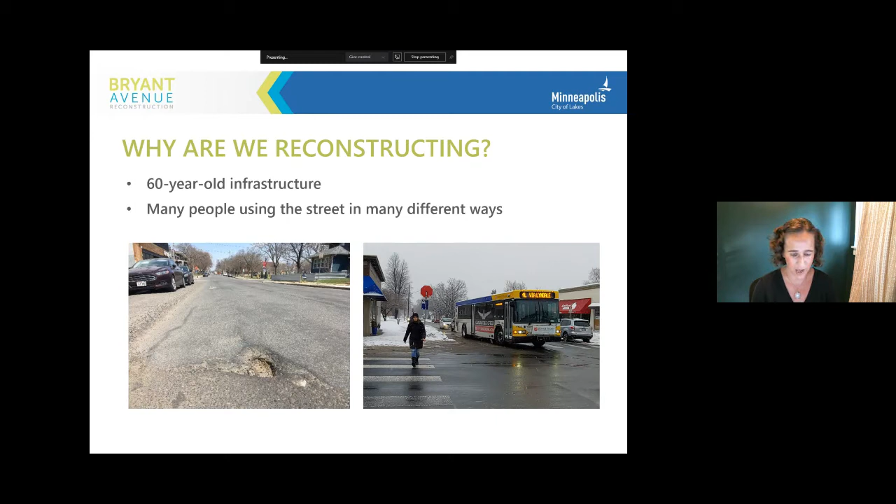The other reason we're prioritizing Bryant Avenue South is because there's many different people using the street in many different ways. This is a highly multimodal corridor. We have high counts for bicycles and pedestrians, as well as transit users. So we at the city are prioritizing those types of streets when we're looking at asset condition on top of that to make new investments.

A note about funding for this project: there are assessments that come along with this reconstruction project that will be charged to property owners adjacent to Bryant Avenue South. The assessment amounts do not vary based on the project design—we could pave this street with gold and the amount we charge property owners would not change. There's a difference in rates charged between residential and non-residential properties, like commercial property. But for the large majority of this corridor, it's a typical single-family residential lot. For that type of lot, you'd expect to pay approximately $4,500 to $5,500 plus interest for this project.

These payments can be made over 20 years, but there are different payment terms available. If you have more questions, you can talk to our special assessments office, or if you don't have a typical residential family lot and want a better range for you, their contact information is below.

The other thing to note is for the Bryant Avenue part of this project, our latest rough estimate is approximately $19 million for this 2.5-mile reconstruction project. Of that $19.4 million, we expect $2.1 million to be paid from assessments, and the other amount would come from different city sources.

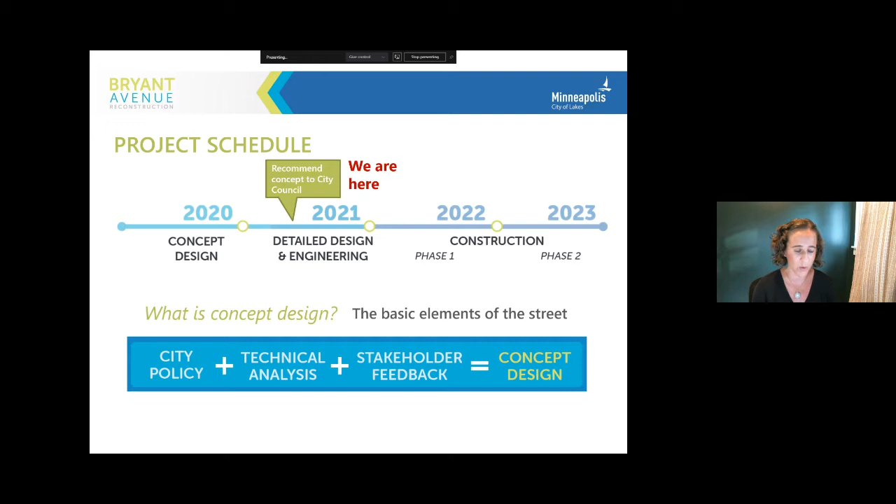For the project schedule, we are wrapping up this phase of engagement, our concept design part of the project. We're at the end of that, and we make a recommendation to the Transportation and Public Works Committee of the City Council. After that recommendation is passed by council, we move into our detailed design and engineering phase. During that phase, the basic elements of the street don't change, so we're here tonight sharing our recommended concept for what the street will look like going into detailed design. We then expect to begin construction in 2022, with a phase 2 of construction in 2023, given the length of the project. We don't know yet which side of the project, north or south, would go first—we're still working on that construction phasing, which would be worked out during detailed design and engineering.

So I wanted to give an overview of what our concept design is, the types of things that go into this process, what we've heard so far, and how we've incorporated that into our recommended design that we're sharing with you tonight. There are 3 big pieces that go into concept design: our city policy, our technical analysis of the corridor, and our stakeholder feedback from conversations like this. It's important to understand that when Public Works comes to a reconstruction project like this, there's a whole suite of policies that guide and direct us for what is possible and what we can bring out as potential options for a street design.

The overarching thrust of these policies is that we are to prioritize our most vulnerable street users first. That means we're looking to make safe, comfortable, and connected routes for pedestrians, people who bike, and people taking transit. That's really our guiding policy for how we design these streets. Obviously there's a lot of balancing act that comes into this, but that's the thing we keep in the forefront of our minds.

The next piece is, from those city policies, at the outset of this project Public Works derived a set of project goals. Those should probably be pretty familiar to some of you, but I'll read them out: improve pedestrian safety, access, and comfort; create an all ages, all abilities bicycle connection in the area, so something an 8-year-old would feel safe riding, with comfortable and safe crossings at busy intersections; support existing and future transit service; use green infrastructure to collect and treat stormwater runoff; and finally, accommodate business deliveries and customer access.

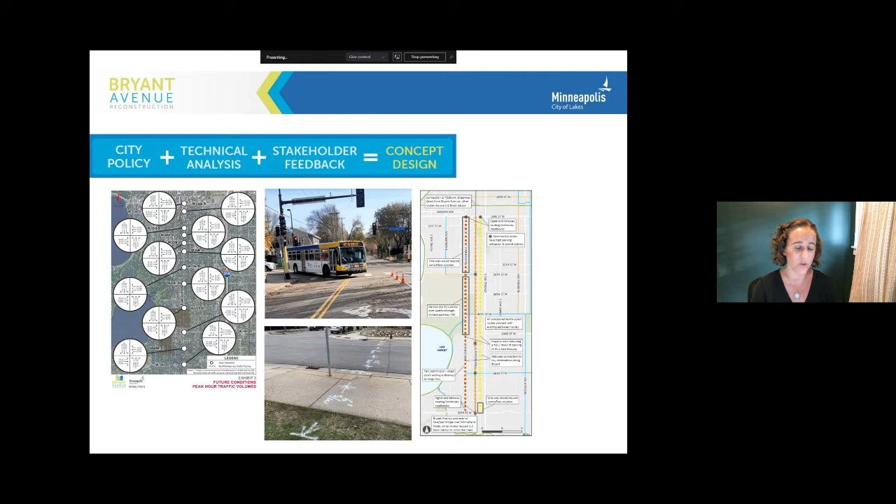The last piece that goes into our concept design recommendation is stakeholder feedback. For this project, we've had four rounds of stakeholder feedback, this being our last one. I'm going to share a bit about the high-level themes we've heard through those, and how we've incorporated them into our recommended design tonight.

Throughout this process, as I mentioned at the outset, it's been a pretty challenging time to stay connected with people, so again I want to thank everyone who's had conversations with us. When I look back, we really managed to reach a lot of folks through some of these online opportunities, which are probably going to stay with Public Works going forward, given that they often offer different flexibilities for different types of people to attend.

Overall, for this project, we've talked to over 40 businesses via phone conversations and small group virtual discussions. We've attended neighborhood group meetings, talked to corridor and resident stakeholders via our virtual open houses and small group live discussions. We've put up feedback maps and online surveys so people could send us comments directly in an easy-to-use format. We've hosted discussion hours, and between Trey and I, we've had a whole host of conversations via phone and email with all kinds of stakeholders in the corridor.

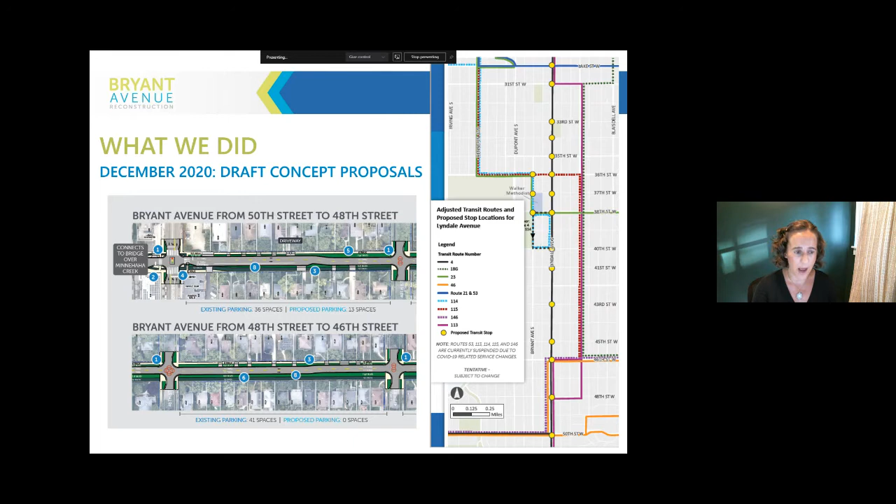We came out with an overview and introduced the idea of what it would look like to move transit to Lyndale. What we heard back from that, after we hosted a virtual open house, as I said — we had feedback maps, we put out a survey — these were the most common themes that we heard.

The first thing we heard was concerns about the idea of a shared use path. South of 40th Street, we had a draft proposal for a shared space for bicyclists and pedestrians to use, so we could carve out more parking and specifically more green space in that southern corridor. People also had concerns about parking removal, specifically at business nodes with this option.

On the Lyndale side, we heard about the difficulty people had when walking, trying to cross Lyndale, specifically at unsignalized intersections. We had concerns about the lack of detail around the design idea itself, and then concerns about traffic congestion and impacts to Lyndale residents in the area if we were to move transit to Lyndale.

So we thought, all right, we've got to go back and think about this some more and look at different ways we can use the right of way to try and meet those project goals and stakeholder priorities. So we went back to the drawing board a little bit. The first thing we did was review our alternative bike routes.

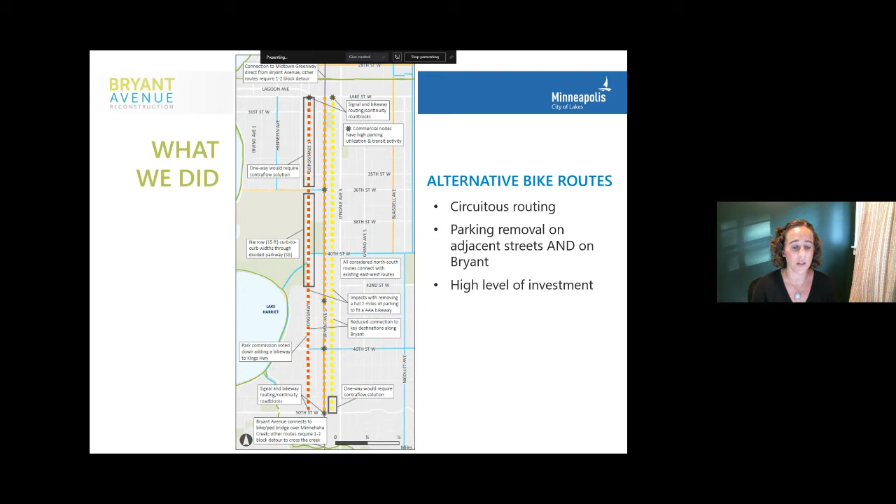So we started to think about the one-way option. We had somewhat considered this idea as a potential option, and asked about it in our earlier survey, but got mixed results because we didn't have a lot of detail around people's interest in it.

Given the original results of people's take on the two-way, we started to detail out what a one-way would mean, what the trade-offs would be, and what traffic challenges we may have. When we looked at it, there were a lot of really good things that came out of this in terms of our project goals and stakeholder priorities.

First, we'd be able to fully separate out a bicycle trail and a sidewalk for the full corridor. Second, we'd be able to put in more green space than even with the two-way. And lastly, we'd be able to maintain more on-street parking, specifically at our business nodes.

Along with that one-way option, we brought out a detailed drawing of what it would look like and what it would mean to move transit to Lyndale. Trey can talk a little bit more about that in the second half of this presentation.

In response to that May draft, the biggest themes we heard were support for the one-way option, a fair amount of support for that. We didn't get full support, but we started to hear a lot of people seem to think this might be a good way to balance everything.

We definitely heard a desire for a wider bike trail. In some sections of the corridor where we have our most constrained areas, we are recommending an 8-foot trail, and people were looking for it to be 10 feet wide through the whole corridor.

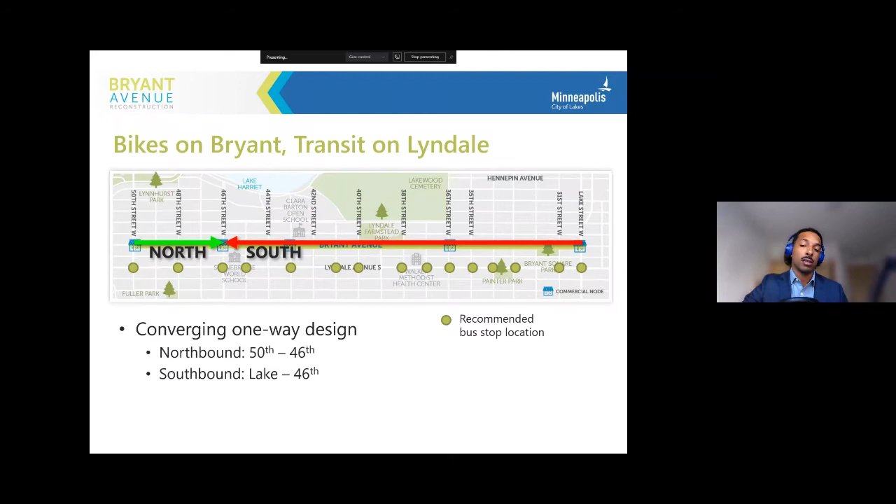Before I talk about that, I want to talk about the recommended transit proposal. We'll be relocating 6 routes — 3 local routes and 3 limited stop routes. There will be 15 consolidated stops, mostly located at signalized intersections, some at unsignalized intersections, with a combination of in-lane and pull-out stops. I'll talk a little bit about what those are in a bit. We'll also be making accommodations for room for transit amenities such as shelters. And for a small portion of the corridor, between 38th Street and 36th Street, we'll be accommodating a contraflow transit lane, which I'll talk about in a bit.

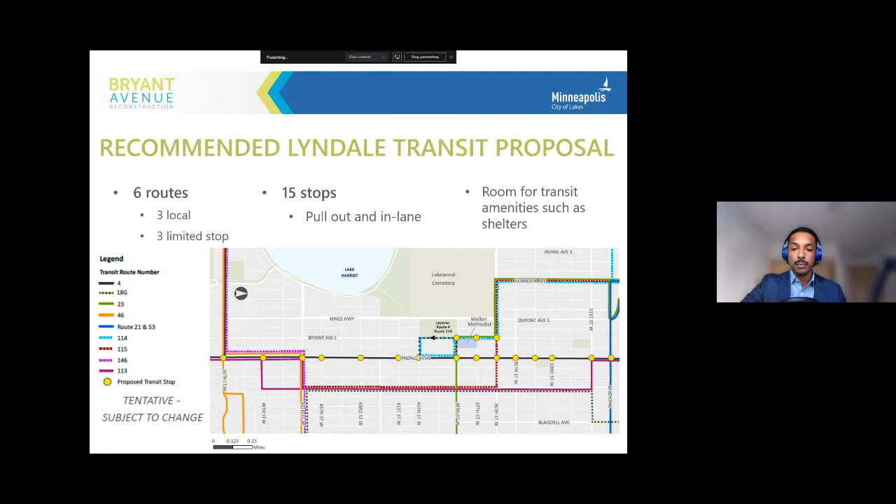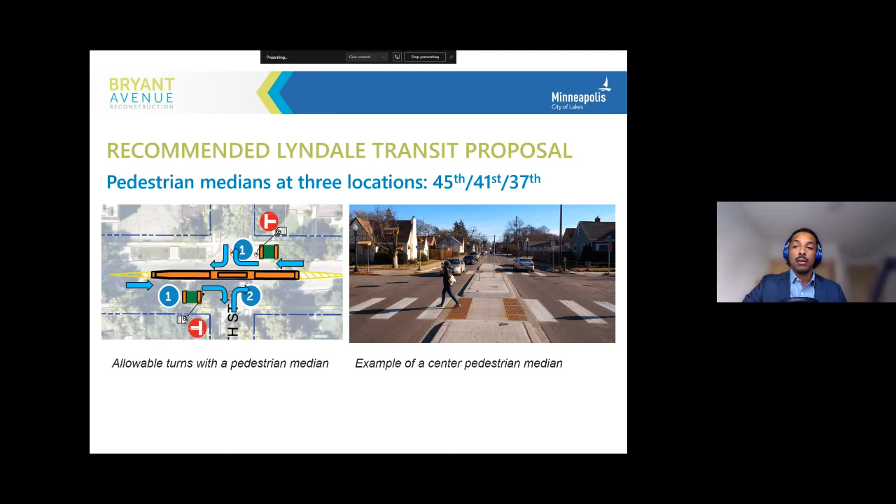Some of the other more substantial changes to Lyndale to accommodate transit are the modifications at 50th to the curb lines, to accommodate a pull-out stop, which I'll show in the next slide, and also to accommodate buses turning from 50th onto Lyndale.

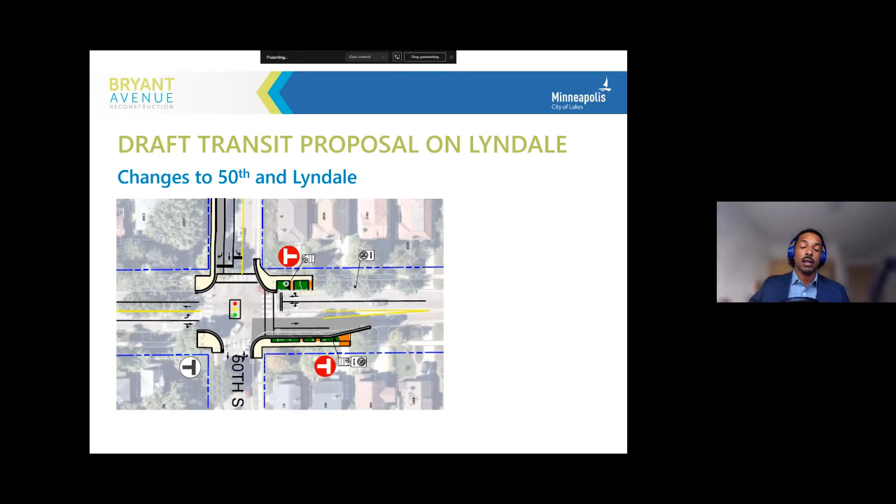In this location, where the arrow is pointing, we'll have to move the curb back a bit to ensure a bus can turn from 50th onto Lyndale and get out of the travelway at a busy intersection, allowing cars to further progress northbound on Lyndale Avenue South.

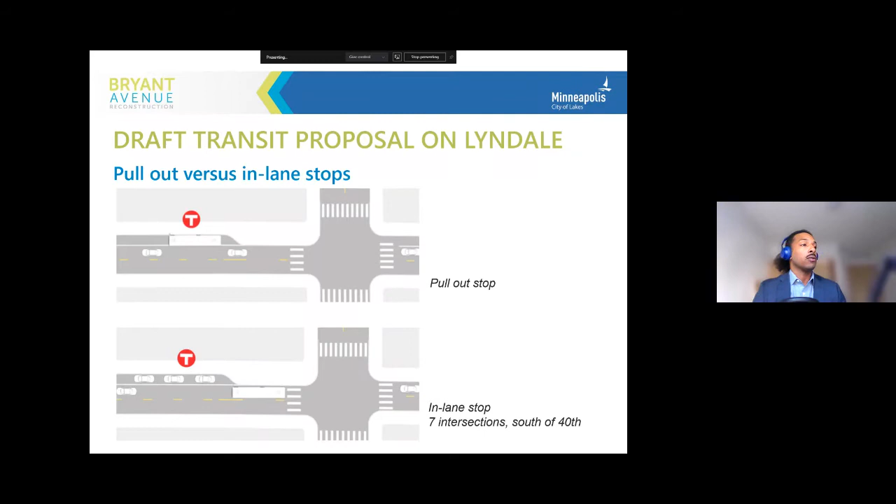Here's a quick graphic showing the difference between a pull-out and in-lane stop. At some locations along Lyndale, we already have a turn lane so we don't have to build a pull-out stop there. In other locations, like 50th, we'll have to build that to accommodate buses stopping on Lyndale. And at other locations, seven intersections south of 40th, buses will stop in-lane, particularly because there are lower transit rider numbers, and that works out when you model the ridership that way.

Some other context around relocating transit to Lyndale: Metro Transit has identified this area, specifically Lyndale, as a candidate for bus rapid transit, aBRT, prior to 2040. ABRT essentially means half-mile stops, so for a 2.5-mile corridor we're talking about a minimal number of spots. But ABRT also comes with the addition of bus shelters, which you can see in the bottom left graphic, requiring a bit of space to accommodate off-street.

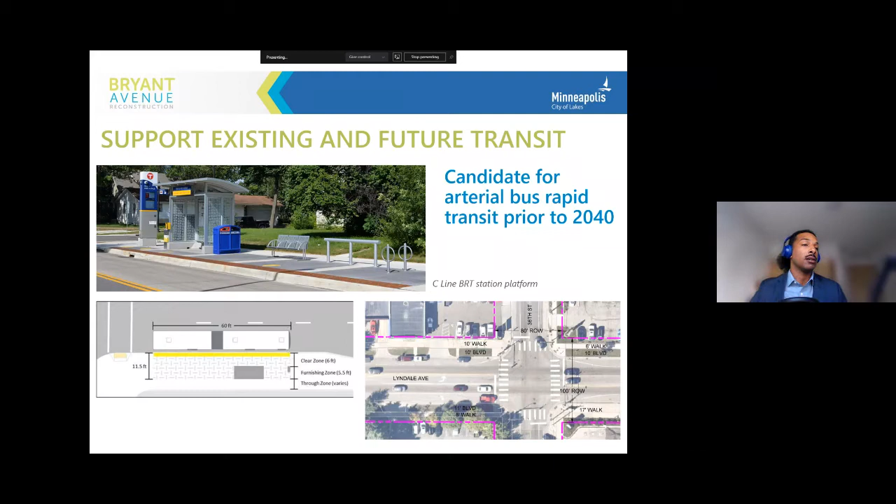So a bit more about the converging one-way concept, and the one-way concept in general, and the opportunities it presents to address some of our city goals and stakeholder feedback: we're able to separate out space for bicyclists.

We heard when we came out with our concept on December 20th that the shared use trail in the southern half of the corridor wasn't really meeting a lot of stakeholder priorities, and in some cases, city goals. So we're thinking that by getting more space through the one-way design, we're able to separate those bicycle facilities out.

We'll separate the bicycle facilities out, providing separate space for pedestrians and separate space for bicyclists for the full length of the corridor. We're also able to get a lot more green infrastructure along the corridor. With larger boulevards, we're able to treat more stormwater, and as Liz mentioned, get more parking at some of our areas where we know we need an acceptable number of parking spaces—our business nodes.

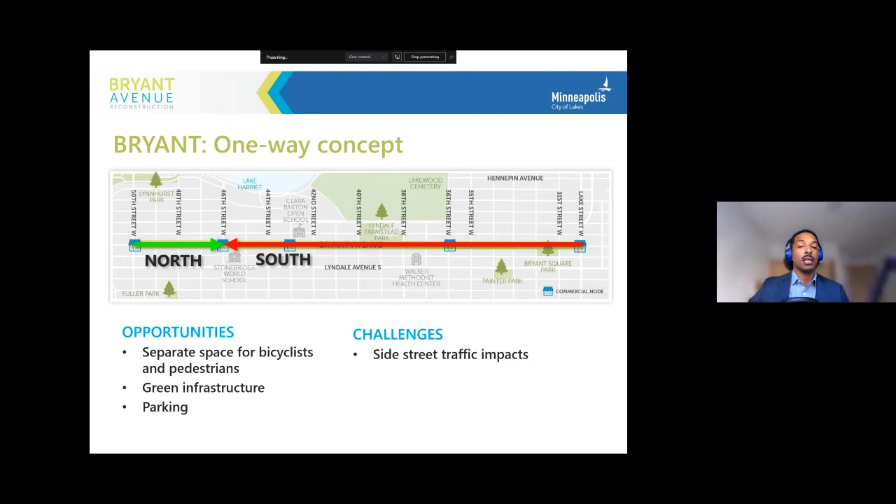So the converging one-way design—some of you may be asking, why is that a thing? It's particularly because, since Bryant is hemmed in by Lake and 50th, two busy roads, we need to be able to get vehicles from those roads down into Bryant.

Also, regarding the southbound direction from Lake to 46th, in this image is Clara Barton Open School, which has bus loading on the west side of the street. Buses don't have doors on the left side, so we have to accommodate how kids will load onto those buses during busy school times. We actually went out to the corridor and observed one of their loading hours, and it's essential that they get the space they need to load the kids onto the bus—it's an interesting thing to watch.

But also, regarding having a northbound one-way from 50th to 46th, it's primarily to serve as a confluence for traffic coming off 50th.

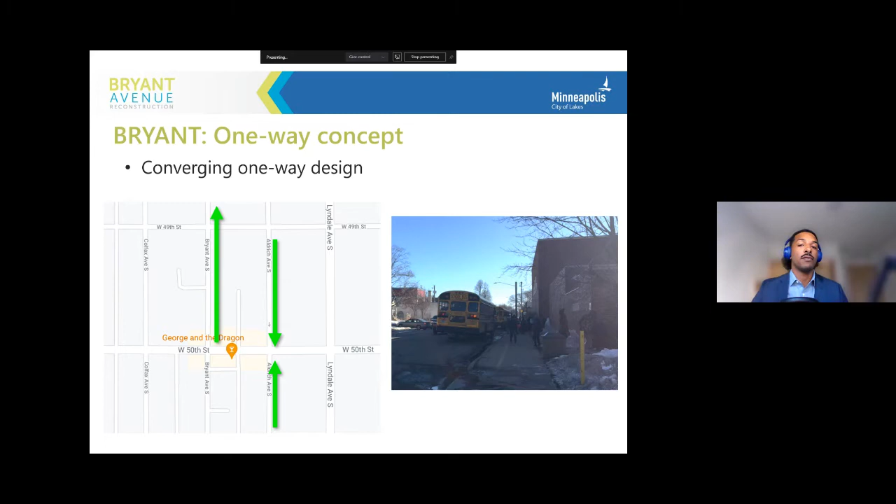So a bit more on the traffic impacts. Here they're showing generally what the impacts on the adjacent streets will be because of the converging one-way design. I'll start with Lyndale. Just to note, Lyndale is a busy road that carries about 10,000 vehicles a day, and during the peak hour we're anticipating about 65 to 100 additional vehicles. Given the scope of Lyndale's 10,000 vehicles a day, that's a pretty unnoticeable amount. For the adjacent side streets, Aldrich, Colfax, and DuPont, we're expecting about 20 to 35 vehicles in the peak hour, which is a modest increase on these residential roads, but nothing too exorbitant to where we wouldn't feel comfortable with our proposal to do the converging one-way design.

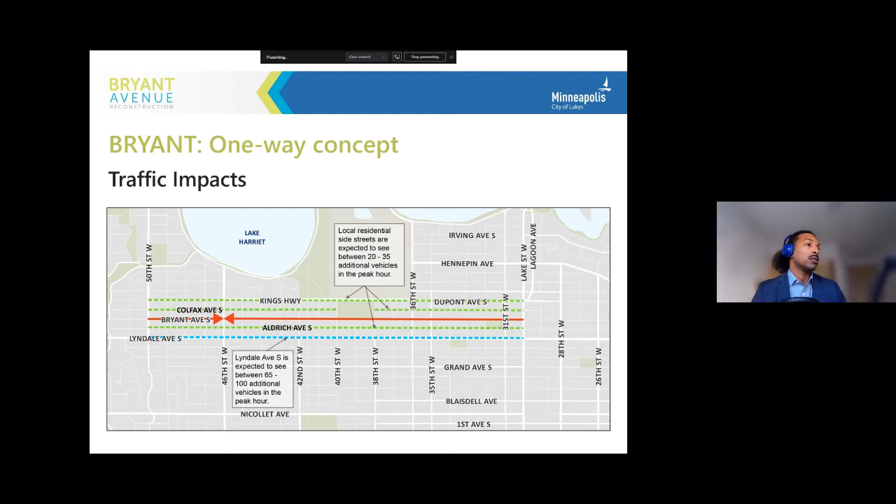To address some of the feedback we received during our last round of engagement, where people felt uncomfortable with a one-way design, we got a lot of comments about the speed at which vehicles would travel along a one-way, more akin to the typical one-ways in the city, like Blaisdell, which have two travel lanes and a wider corridor. This design would be more similar to West Minnehaha Parkway, where we have a narrow road cross section coupled with bump outs and on-street parking right-sized for the expected use. That presents a constrained, circuitous, meandering corridor that slows vehicle speeds and creates a safer, calmer street.

As I mentioned earlier, we'll be including bump outs, as you can see in the bottom right of our cross section posted on our website, and also on West Minnehaha Parkway, where pedestrians are able to cross the street at a shorter distance.

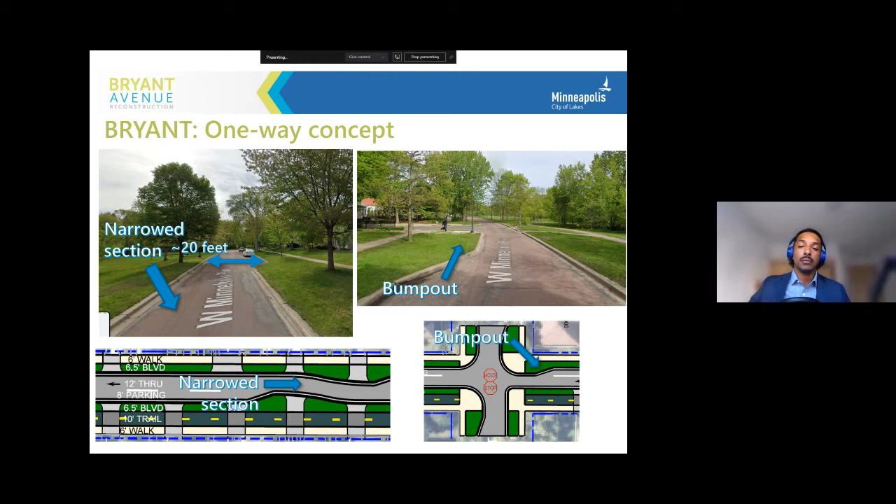Also a bit about the parking spaces on Bryant. While we added in much more parking than what we had in our two-way cross section, we're also right-sizing that parking to address concerns heard during round 1 and round 2 about vehicle speeding toward the southern half of the corridor. When you have overparked parking bays, the corridor appears wider than it actually is, and vehicles feel more comfortable traveling at higher speeds because they don't feel like they're going to hit anything. So we've right-sized that parking and also added treatments like chicanes - that meander in the center of the street - which will help slow vehicles as they travel along it.

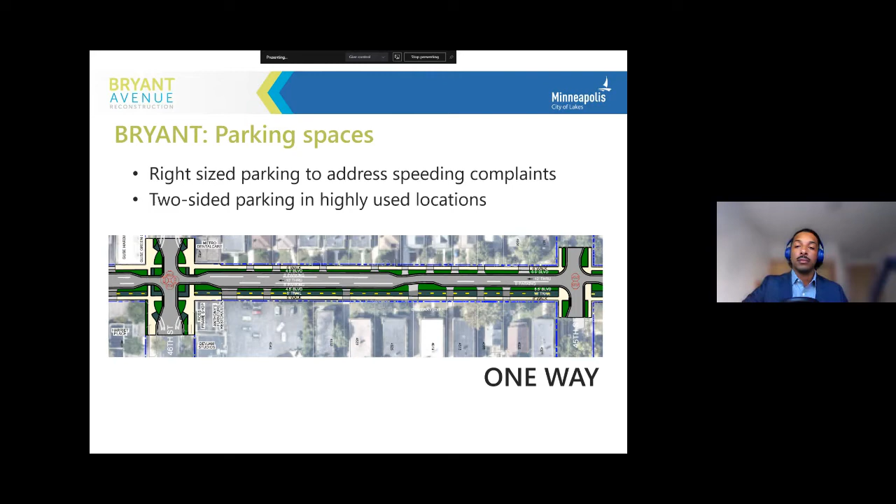I mentioned earlier I'll talk about the contraflow lane we have to accommodate Metro Mobility and transit service. This is particularly because we need to get front-door service to Walker Methodist. Walker Methodist has needs due to the nature of its function for transit at the front door, which we want to accommodate, as well as emergency services that frequently travel to that location.

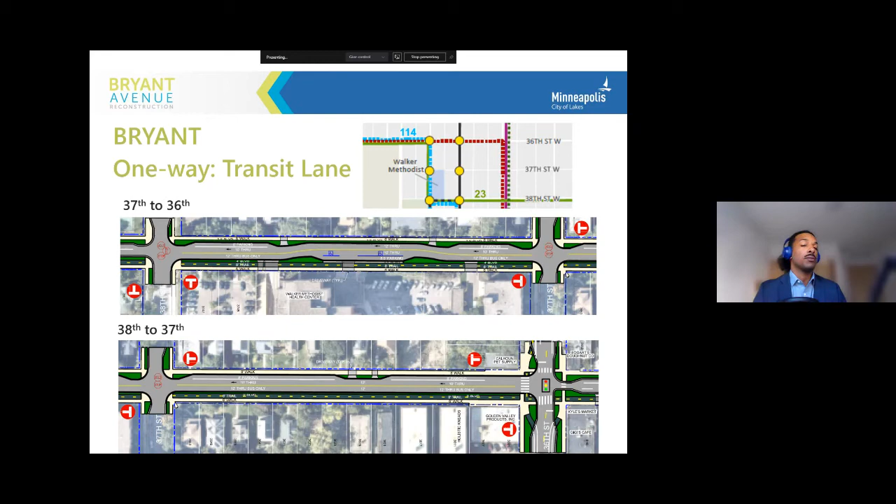Finally, one of the great things about the one-way cross-section proposal is we get to treat more stormwater. Liz may have mentioned this earlier, but adding green infrastructure as a project goal is new for Public Works - not something we've done on projects previously - and we wanted to make it a priority with this project. With the one-way design, we get larger boulevards and can treat more stormwater, with a larger drainage area, as shown in the image here; you can view our stormwater numbers on the website. The larger the drainage area, the more you need to treat it, and in this case much of the drainage area is in the street, so treating it meets some of our project goals.

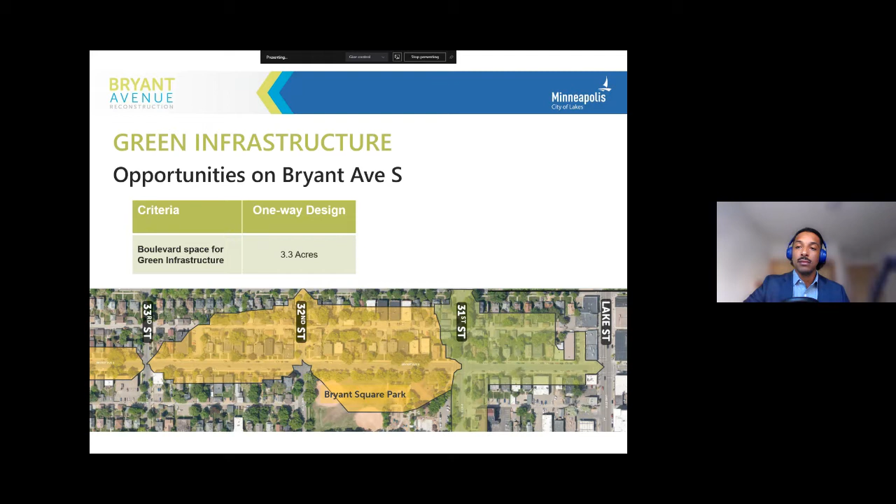I'll briefly talk about next steps. We'll be taking this project to the Transportation and Public Works Committee, a subcommittee of City Council that reviews transportation projects for proposed adoption. After that phase, as Liz mentioned earlier, we'll move into detailed engineering design where we figure out the nuts and bolts in the street. From that point on, we'll have ongoing outreach to Bryant property owners to ensure we're having the conversations we need to have, and we'll be preparing for 2022-2023 construction.